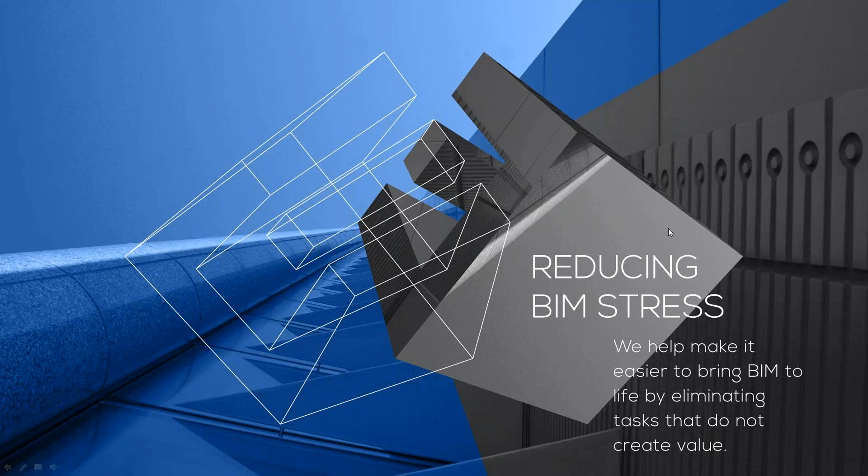A few words about our company: AGACAD is a developer, we sell our products worldwide, and we have more than 10,000 users already. We keep developing our tools, and our promise to users is to reduce stress, eliminate unnecessary tasks, and create effective ways to work with Revit.

In this presentation I will talk about precast concrete. I will talk about modeling of precast elements, how to model elements, how to insert details, how to sort elements, and how to create drawings. For this I will use different tools which are included in the Precast Concrete Suite.

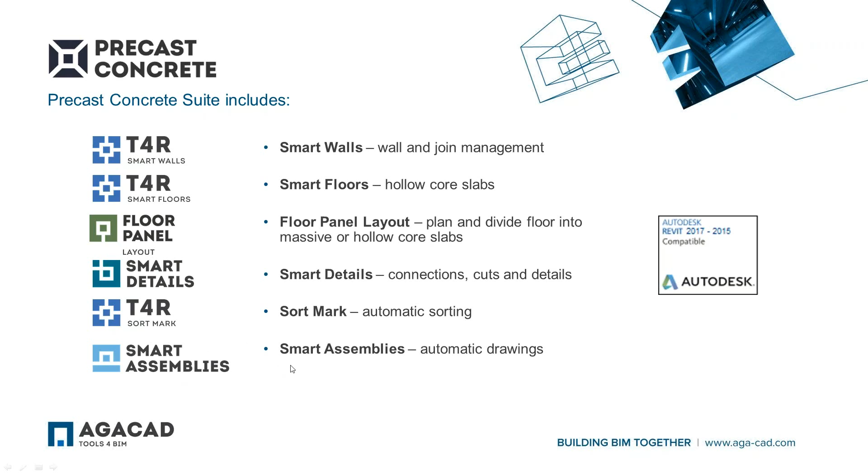We have Smart Walls to split walls, Smart Floors and Floor Panel Layout to create hollow core slabs or just massive slabs. Then Smart Details to insert connections and cuts and any kind of details. Then we sort elements automatically according to size, type, or whatever parameters we have. And then Smart Assemblies to create drawings in the end.

So again, you see here information on what you will see: how to split walls, how to create hollow core slabs, and prepare shop drawings. Anyway, we will see this in a live demo. So let's just switch to Revit.

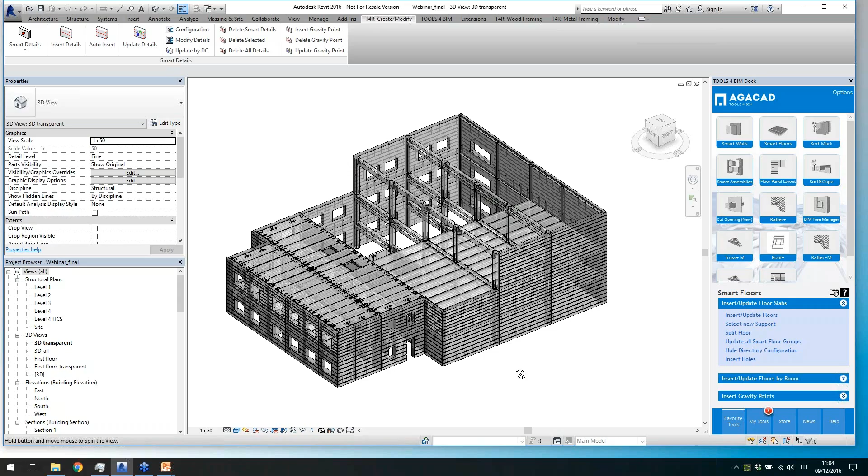I need to maximize this one. So here you see an already created project with walls divided into separate panels, then floors created, hollow core slabs created, then I have details inserted into different elements. So I have automatically distributed different kinds of details, cuts, at the ends of the slab, at the sides of the slab - just face-based details inserted in different ways.

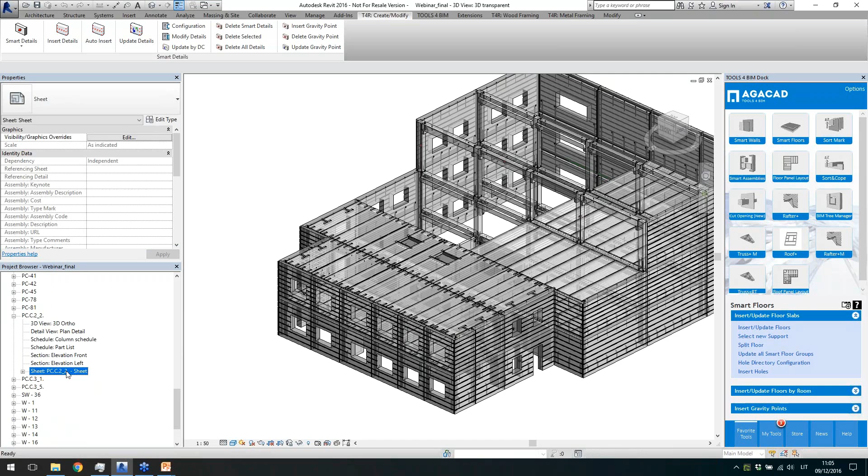And then at the bottom I have all my assemblies, and what we can create is this kind of automatic drawings - it places views on the sheet automatically and places automatic dimensions. So let's see a few other examples and we'll get to action.

Okay, I will close down this example project, and now let's see how to do that. I will use this project - it's not finally created, so let's start. First of all, I will go to level 1, and let's overview the Smart Walls solution. So Smart Walls are for splitting walls. Basically this is the main feature I want to share with you, but Smart Walls also have a few other features, like if you click on this command of Smart Walls.

Like if you will click on this command of Smart Walls.

So you can see all the walls in your project. You can group them differently according to different parameters. You can add any information here in this window, and it's easier just to control information, to change data in these columns.

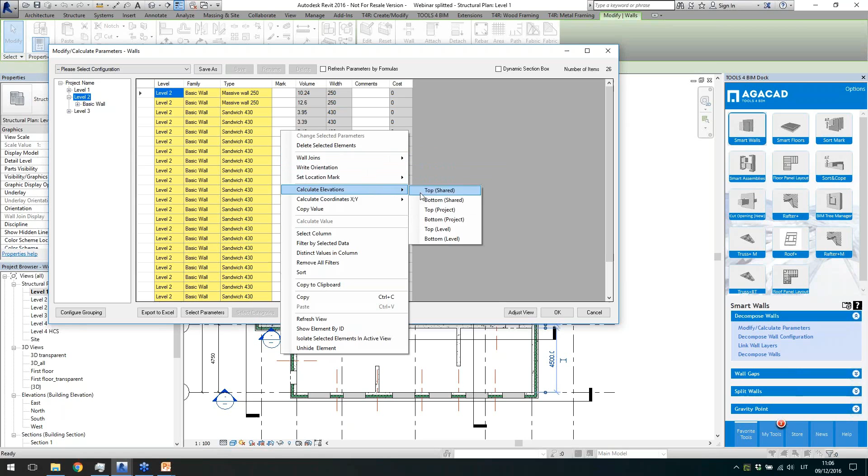You can also, let's say, disallow joins of selected walls. You can calculate elevations or write some additional information here or delete information. So in this window you can just manage the walls.

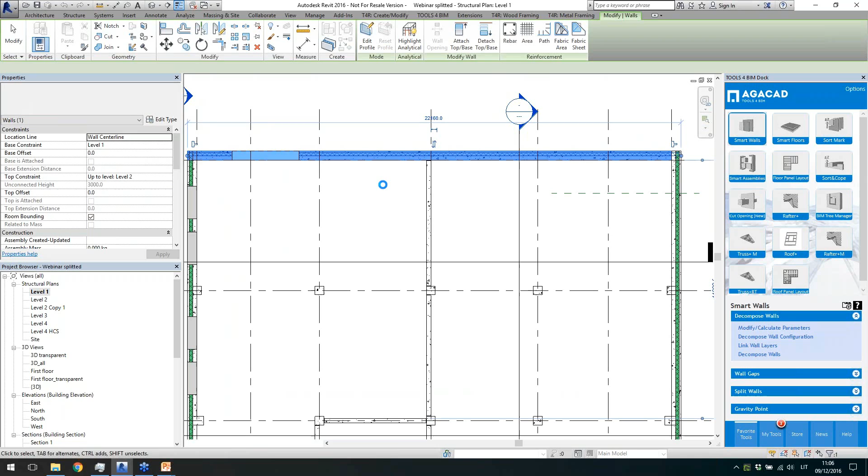And then another feature is to decompose walls. So if you have a multi-layered wall, you can just decompose it. What does this mean? It means that you can create separate walls from this one wall, so you can create 2 walls or 3 walls. In this case I have created 3 different walls, so you see now different types of walls created.

So sometimes it's good when you want to separate architectural layers from structural layers. You can use this functionality also. But today mainly I will talk about splitting of the walls.

So we have this split wall menu, different commands how to split walls, and over here we can define some gaps, gap configuration by wall type.

I will open this one just to show you that you can assign different gaps between walls. When you proceed with the splitting command, these gaps will be applied at the splitting line. So I just have different gaps for different types of wall.

So I have this wall in my project, so I will have 0 gap, and 20 millimeters gap, and so on. So I do this modification, and if I use, let's say, this command shorten picked wall end, with this command I can just separate my walls one from the other.

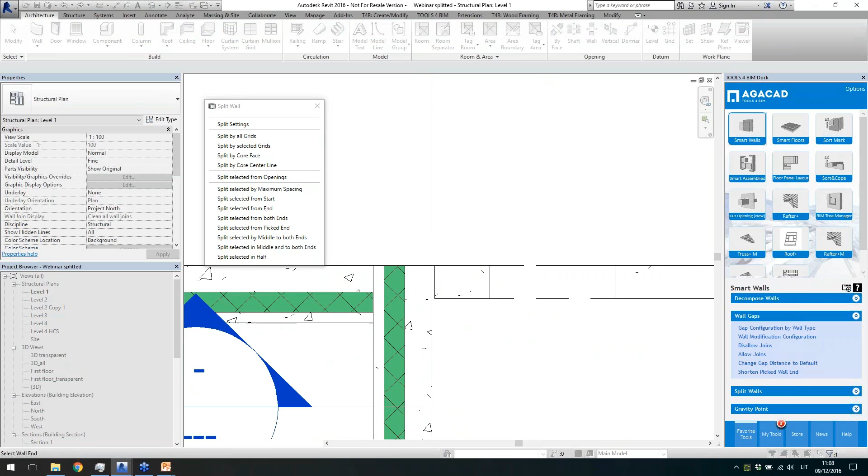Let's say I will select this end of the wall, so it was disconnected. Then I select this wall, and now you see I have 0 gap here, but I have 20 millimeters gap here because this is the setting for this type of wall. So I can do that in the desired position.

I just can separate these walls from one another. So this is like one of the ways how to change your connections of walls.

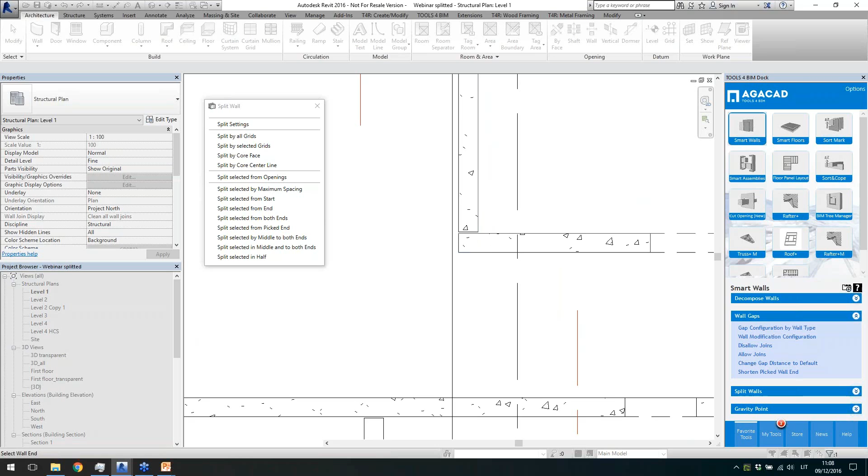Let's say I'll click maybe like this. I will change it back to that. Okay, probably I would want to do it like this. Okay, so I separated some of the walls.

Now I would like to show you splitting settings. So what can we change here? In the splitting settings, we can define what should be the distances from the openings, what should be the panel width, the maximum panel width, or the minimal panel width. According to these settings, our splitting commands will work.

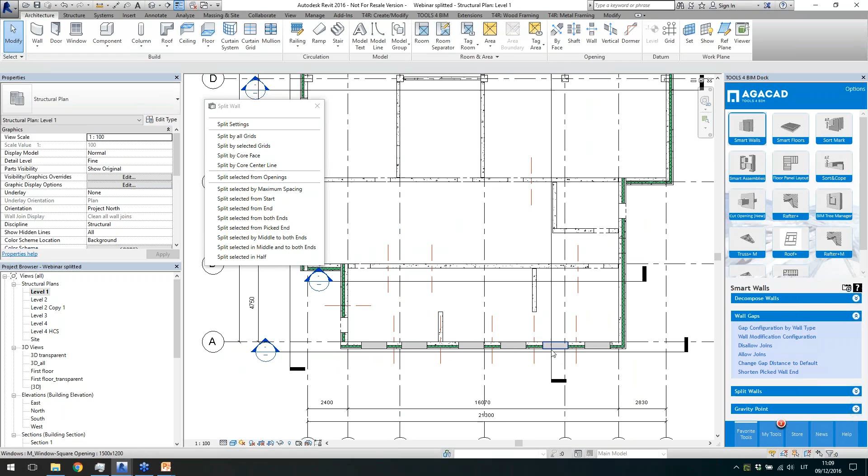So here we have splitting in particular places, a few commands to do that. Let's say I have these fake grid lines, just draw these grid lines, and I can use them to split my walls. First of all, maybe I want to just draw these splitting lines and then coordinate with, let's say, architects or other disciplines, or with a manager or whatever, the splitting location, and then I can use these grid lines to split.

Let's say I will select split by selected grid lines, and then I select these grid lines one by one. Then I hit the escape key, and I select the walls which I want to split, and then escape again. Now you see I have these walls split in the desired place. So this is one of the ways to split in an exact location.

So probably I can also do that here. I want to split it here, here, and here. And I'll click escape, select wall, and click escape again. Okay, so now I have these walls.

And let's say I don't need a special place for this area, so I can just split this one from the start, let's say with a desired step. And you see now I have this wall with defined panel width. I have the splitting, and the last one will be shorter, but that's okay. That's what I wanted to achieve.

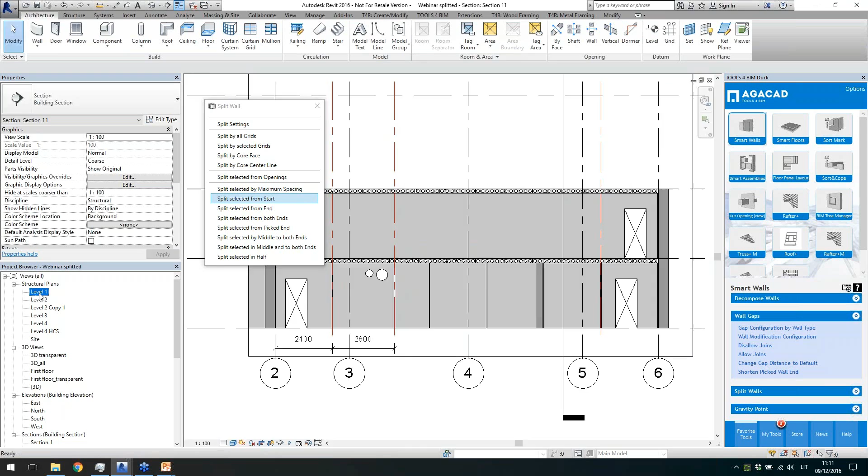So that's the way how to quickly split walls. Then also we can split by core. So I can select one wall, another wall, hit escape key, and I can split just in the middle. Let's say for this kind of connection I need the split in the middle, so actually I use just a wall to split another wall. That's another option.

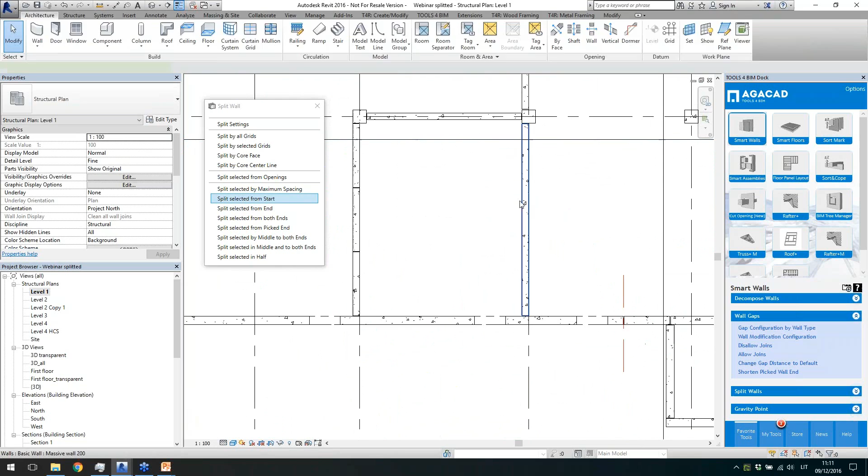Then let's say I also have a long wall, we can select, let's say, split by maximum spacing. So now my panel will be split according to that rule, and now I have limited just the desired number of panels. The split was automatically produced. So that's the way how we can split walls in different ways, just using different commands and controlling this.

So this is the smart wall solution. What can we do with it? I will switch now to smart floors. So smart floor solution is to create hollow core slabs, and for hollow core slabs we have two solutions: smart floors and floor panel layout.

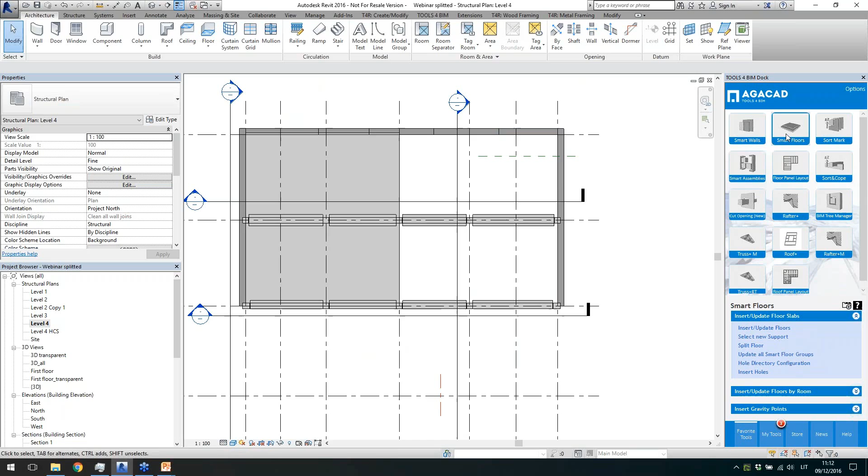So smart floors works like this. I need to define a boundary. Where do I want to place my hollow core slabs?

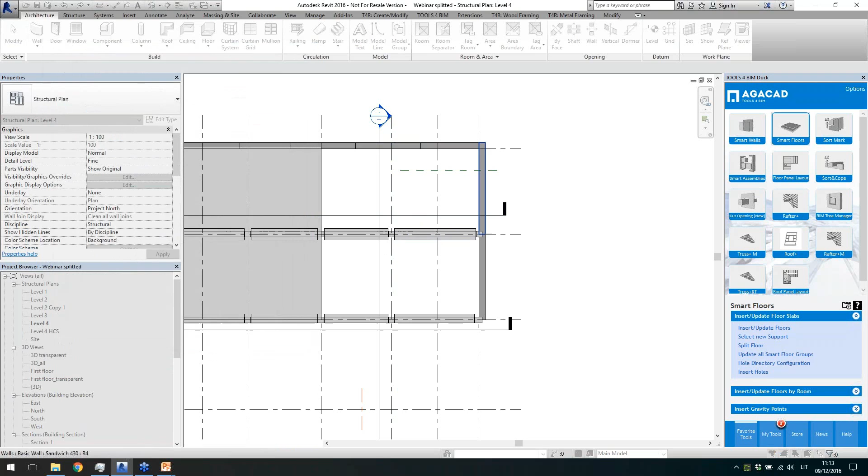And then create them. For this I will use the command Insert Update Floors. Now I will give the name of a group, and define the boundary - where do I want to create my floors. So start support, I can select wall, or I can select beam.

Or layout could be grid line or reference plane. When I do that, I just need to assign the parameter which will be used to calculate and write parameters to the floor, or I can create another shared parameter. This parameter will be used, let's say, to write the length parameter. Then I need to choose the floor type I want to use, and select the openings I want to use.

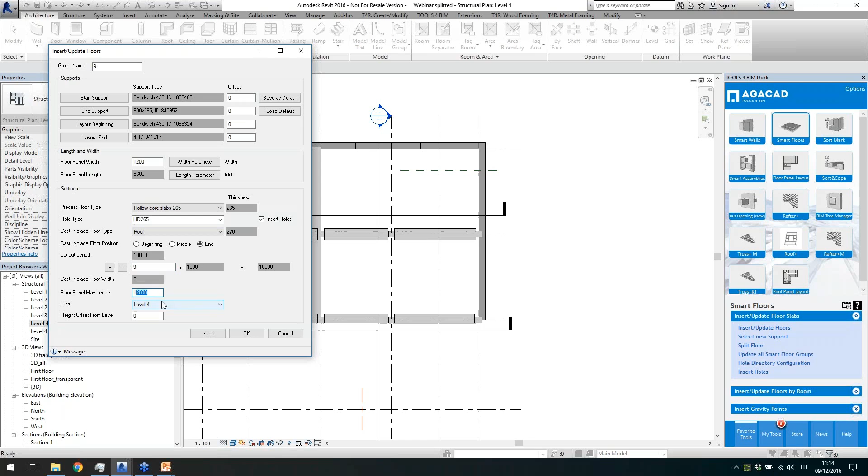These holes are installed with a solution, with the smart floors, but you can modify the shape later. Here I have information about what will be inserted, like panels with desired width, and then the level where it will be inserted. I will do this now - I will just insert these.

So I will close down this window, and now I have this floor, and additionally I have a generic model family of the holes inserted. If I take a look at the 3D view, you see now I have holes, and I have the floor panel, the selected type of floor panels.

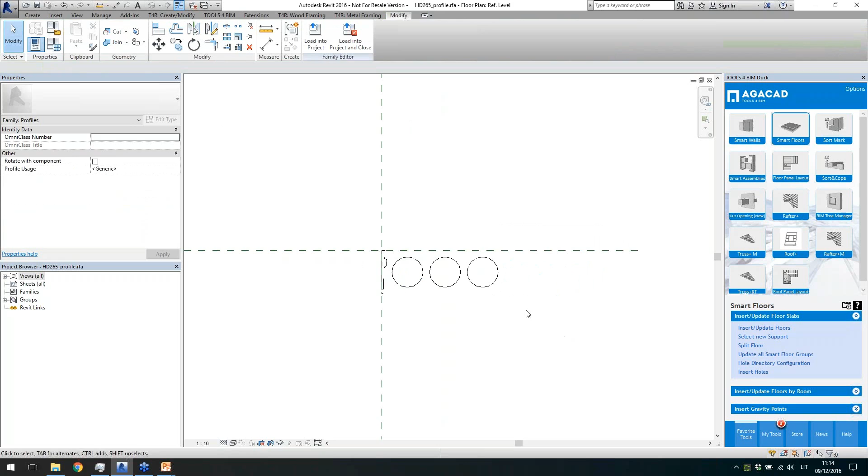How these holes could be modified anytime - I can just select them, edit family, and save it under a different name, and edit the profile, and draw this profile with desired lines. So it could be, I don't know, the holes could be shorter, just to define narrow slabs or whatever. Just prepare them according to your local manufacturer and use it to create hollow core slabs.

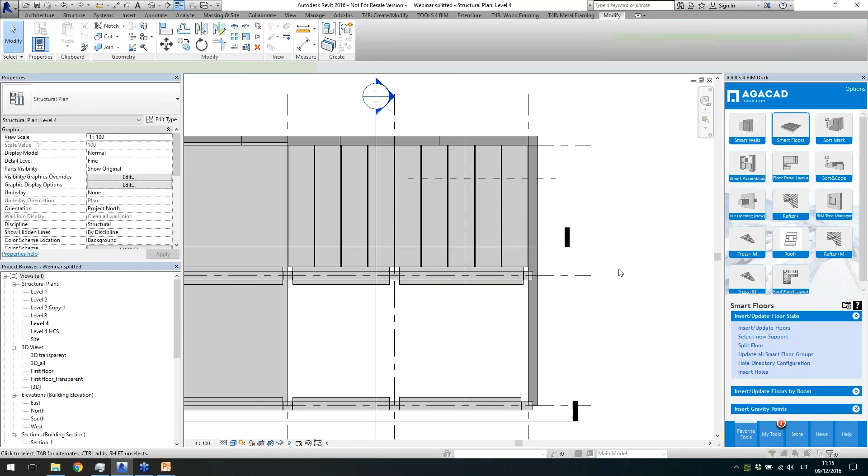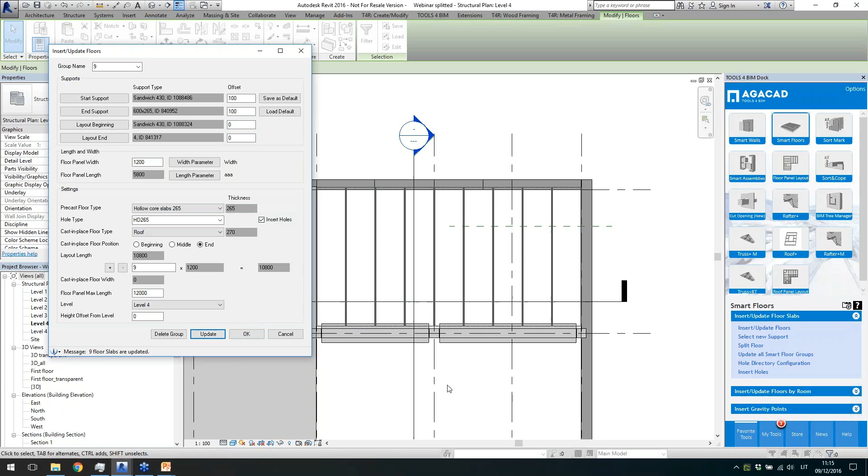Now what's important in this tool is that we can modify these groups. We can, let's say, extend these floors - because now I need to support them on the beam, so I will extend them. Update. So you see now it was extended.

Maybe one more thing I want to show you - you can also change the position, you can change the layout boundary objects. Let's say I will select this one, and I will click on update. So now I have two slabs of this width, and then I have a cast-in-place element because it cannot be created with a 1.2 meter slab.

And all of my slabs have these parameters, as I showed you, like the width parameter of 1.2 meter and this newly created parameter to define the length. So this is the way you can work with these floors.

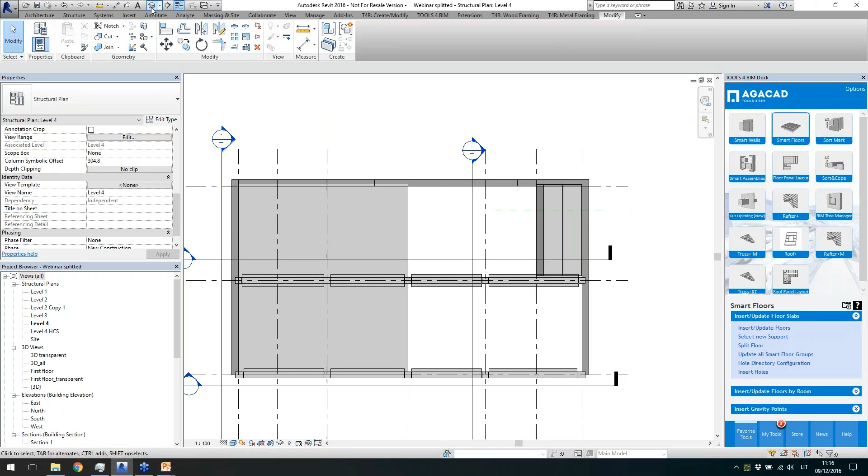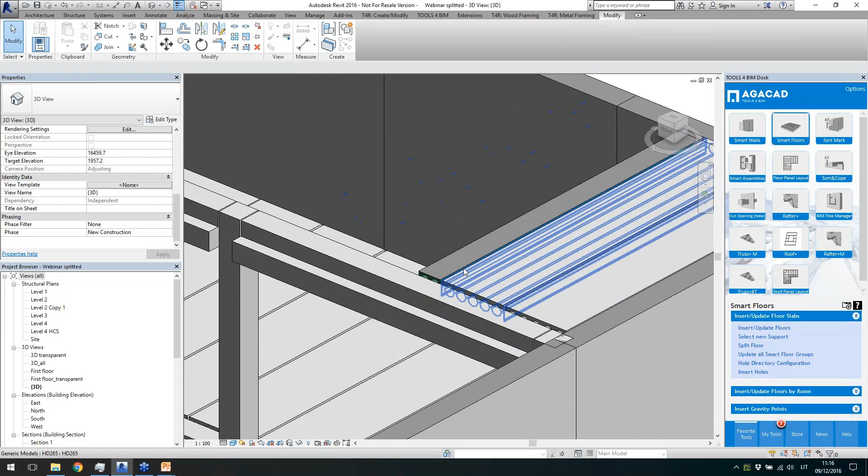And then you have additional options like select new support, so it will be updated, the floors will be updated when you can insert additional floors. Let's say you can select just the floor and insert these holes additionally to the other elements. Then, yeah, different ways how to just update these floors.

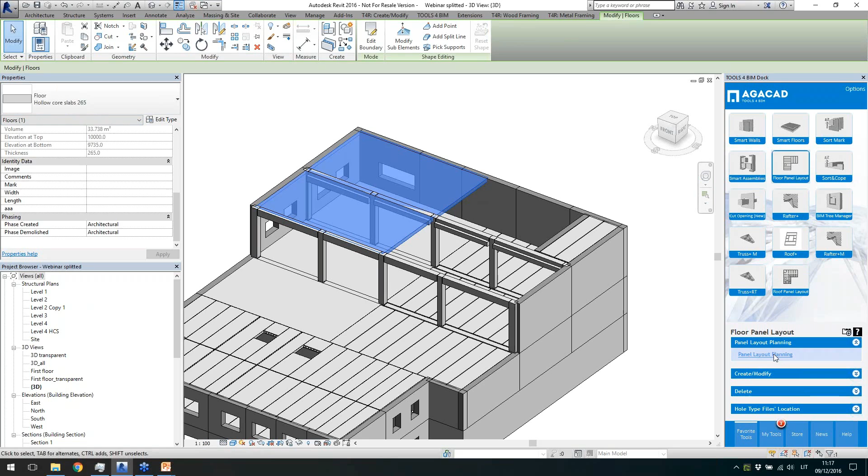Then we have floor panel layout, and we have already created the floor. So the floor panel layout, we can actually just split the existing floor, not create floors like with the smart floors, but just work with this one, with the existing floor.

So what I want to do here, I want to insert floors here and floors here. For this, I need two regions, so I will add a split line, and I will add the split line here. Okay, so now we see I have one region over here and one over here.

And panel layout settings - in this floor panel layout, I can also select similar settings to the smart walls about splitting the width of the panels and the direction where I want to split them. And then I have these commands to create panel layout for the floor face.

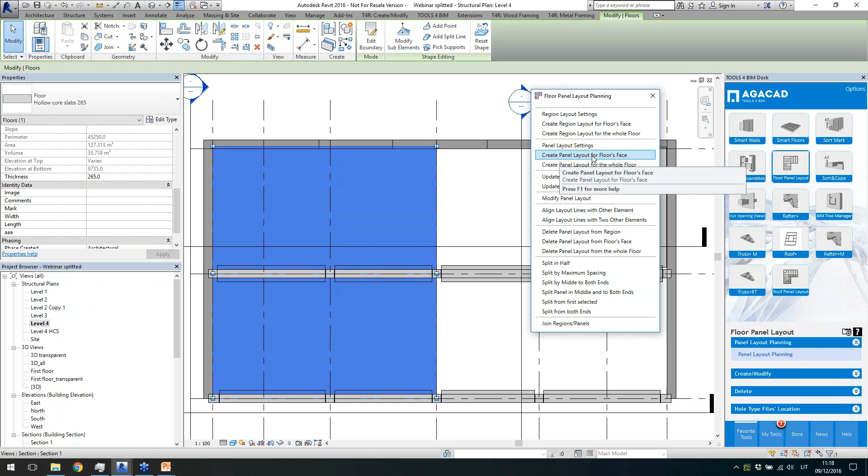I will select this one, and now I can select the side of the area. You see this blue area defines where my floors will be created. So I will click on this area. Okay, so now I have splitting lines, not panels yet, but the lines for my floors. I will do that again, and click on this area. So now it's going to the different direction, but yeah, probably I will just undo that.

I will go over the right direction. So when I hit on this side, I just have different layout direction. Then, okay, if I want to, I can modify these lines.

Now, let's say I will join some regions. I will do this a couple of times. And let's say, what can I do? I can use different commands. I can split it into half, split according to the rules, split by middle to both ends, or whatever.

Okay, so let's say I select this, I will select two of the lines. And now you will see I have 1.2 meter panels in the middle, and leftovers are on the side. So it depends how do you want to do that.

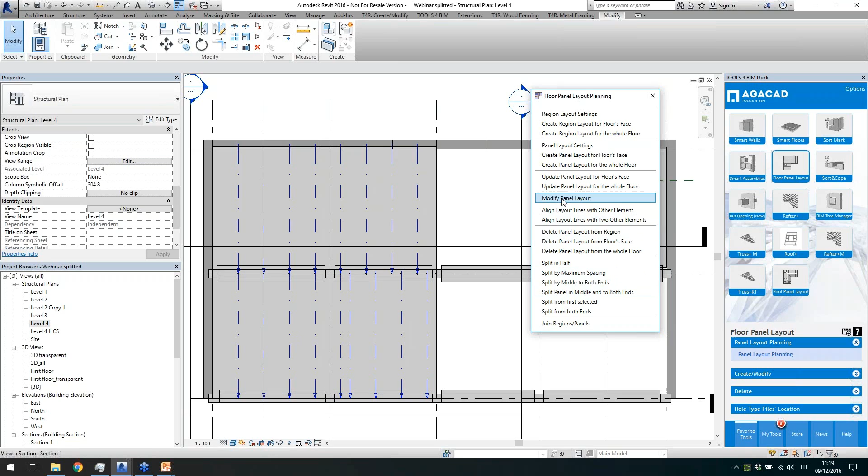You do the planning, use these commands to update, modify, plan, and so on. Delete the regions if you need to. Or there are other commands for how to control this.

And after that, you can go to this create modify panel settings. Also overview what do you want to create, just end and start, offset values, parameters for the width and length, and what can you - if you will insert, what kind of slab do you want to insert, if you want to insert holes, or what should be the cast in place, let's say panel, save these configurations, and create panels, let's say for whole.

Floor. So I will select this floor. And now you will see that I have these panels. Now in this area I have only,

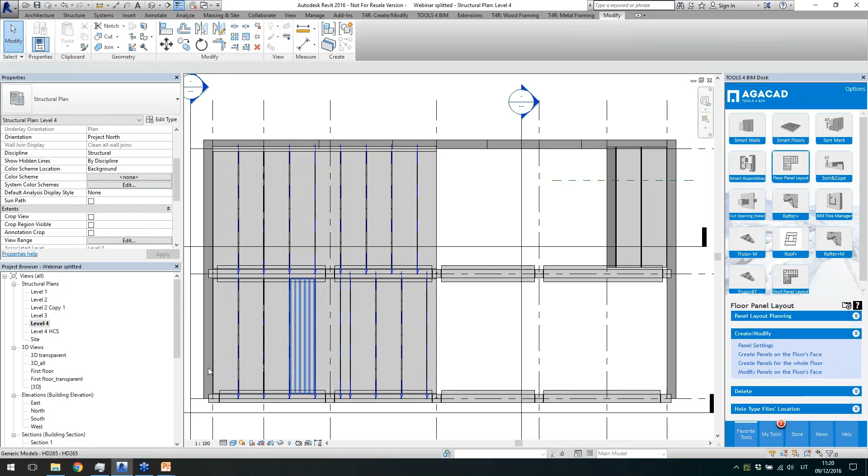let me switch to this one maybe, view. So here I have just a floor without holes, because this is like cast in place floor, and I selected this kind of floor to use in this area. And for this one I selected to use this system floor family, and that's just how I create these floors on top of existing floor.

So that's another way how to create slabs with holes or without holes. So it depends what do you want to create.

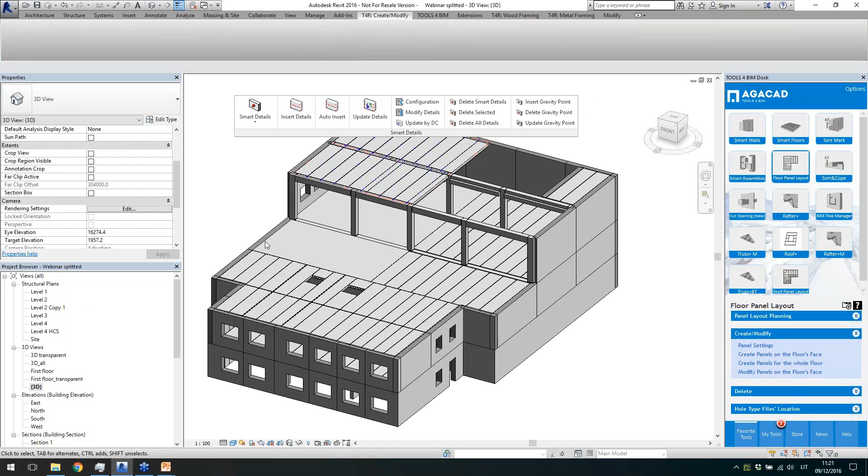Okay, and another solution I have is smart details. So when I have created my elements, now I want to insert some details, connect elements and so on. So let's say, what will I do now? Let's see how it works.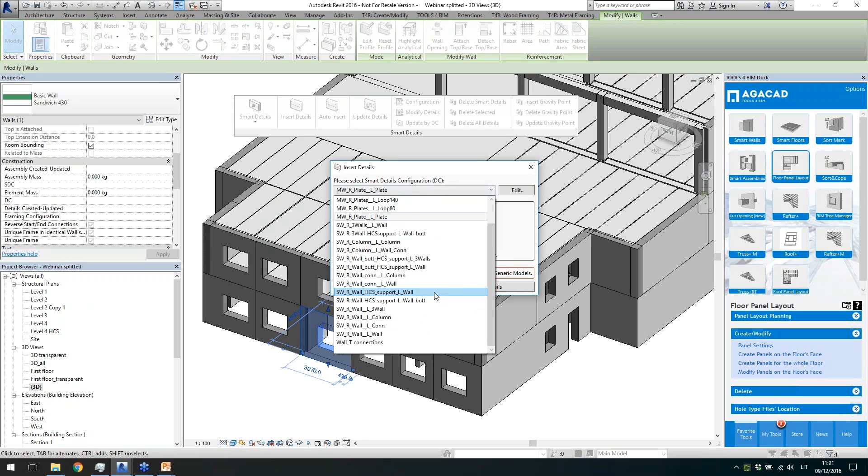I select the element and I click on Insert Details. And then I need to pick the configuration which I want to use here. So I will use this configuration, and I will click on Insert. And I will just go back to configurations later, but let's just see the result.

Maybe I will switch to the transparent view so we can overview what was done with my command. So I have some line-based cuts on the side face of the wall. Then I have some connection details on top, just with defined rules.

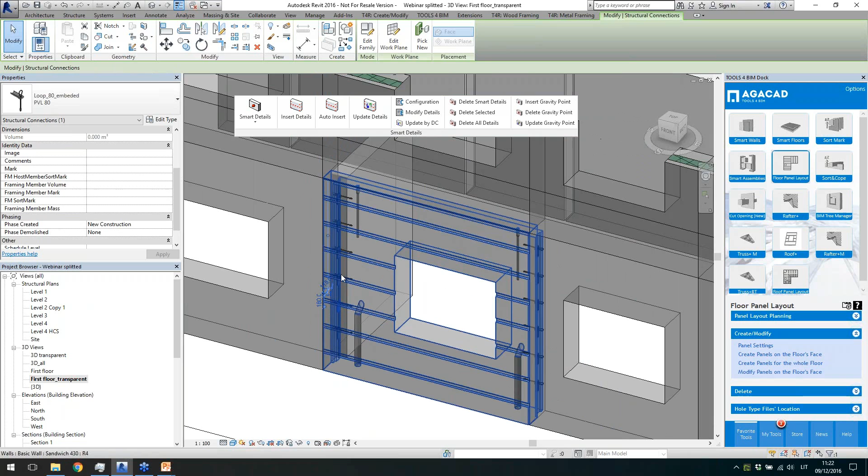Then I have also side cuts, like form of this kind of form at the sides, and then I have distributed some connection details also on the side. And then also I have a cut to support my hollow core slabs here.

So with one command, with one configuration, I just inserted a lot of these details, and I can actually do the same for other elements. I can just select as many as I want of the elements if I think that the same configuration could be applied to them. So I can do that, and let's say the result will look like this.

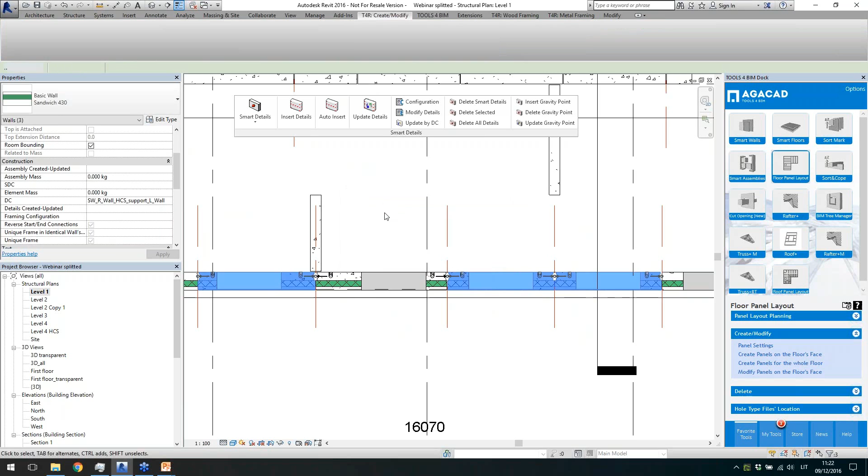So I have these cuts, I have these details, I have some details at the bottom of my walls and so on. So let's see other examples. How can we use smart details?

But yeah, before that I will just go to configurations. Okay, I will select the detail and I will modify this detail, and we can see this configuration which I used. It has such a setup.

On the left side in this configuration window you can see line-based details which can be inserted on different faces, and point-based details which can be inserted on different faces of selected element. And this could be walls, beams, columns, and other elements where you can insert the details.

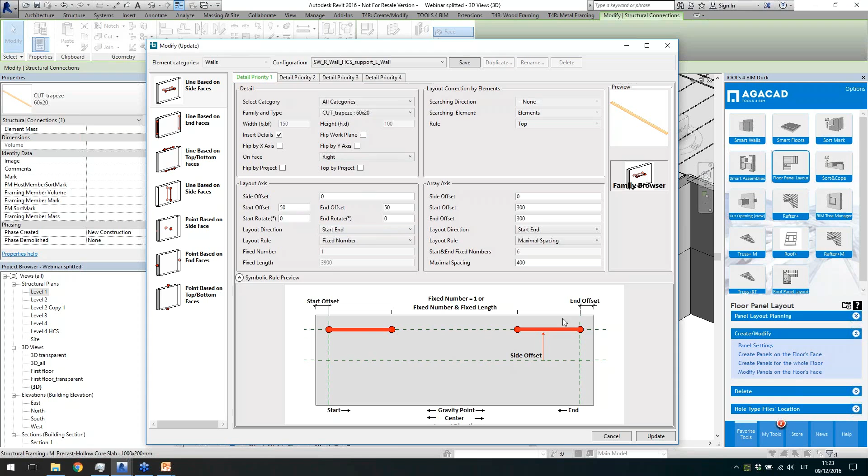So let's say this detail cut was inserted on the right face, and it starts with offset from the ends, and it goes just from the beginning to the end. And in other direction, it has possibility to just distribute them according to a maximum spacing with defined distance. So you have all these possibility to define how to insert detail.

Then on the side faces, I have one detail on one side. Then I have another detail inserted on the opposite side. I have some flipping options for the details.

So there are different ways how to insert these details. Let's say I have point-based details distributed on both faces of my wall with defined distances and maximum spacing. On top I have this detail, at the bottom this detail. So there are really different ways how to do that.

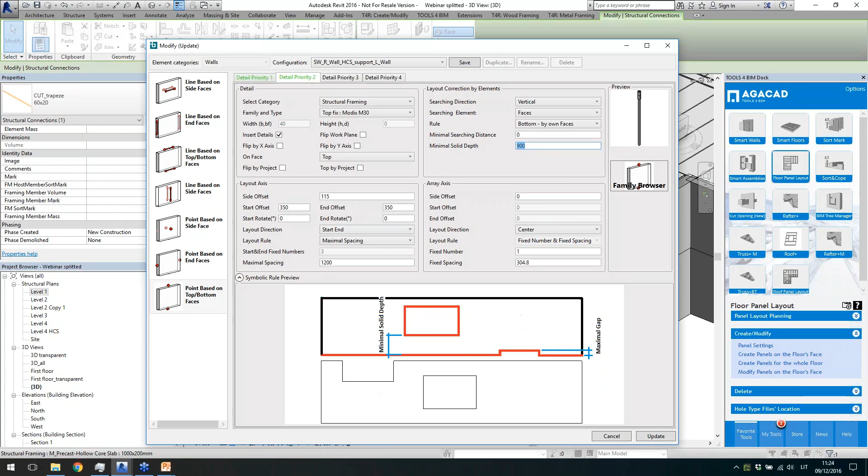I also check if there is enough space to insert this detail. I have a maximum space of 1.2 meters, but if there is not enough, if minimal solid depth is not enough, my detail is not inserted. That's why I don't have it in this place in the middle, because I have a window here.

Okay, so when we've overviewed the configurations, let's see a bit more about smart details. I will select all of these. These are structural framing families, and I will auto-insert details, because auto-insert will just read the smart detail configuration parameter in the element.

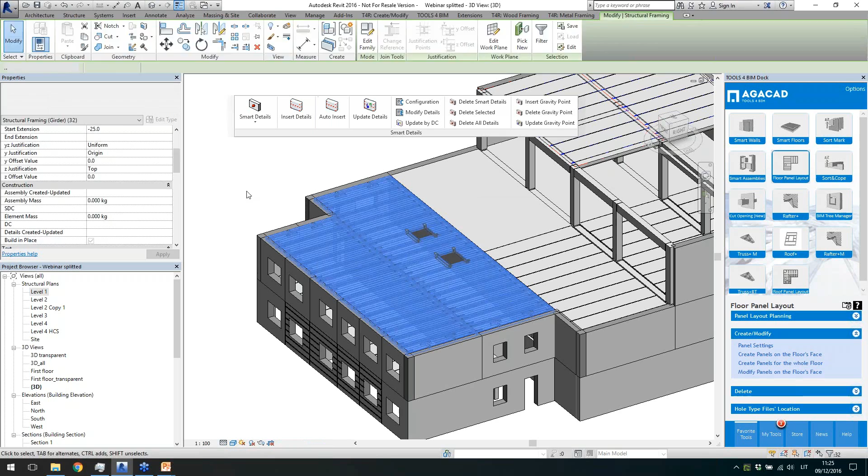So let's say in this element I have the smart detail configuration parameter with this name of configuration. Details were inserted according to that configuration, and this framing element has this configuration, so I have only cuts at the ends. Now you see I have different elements inserted on all of these floors.

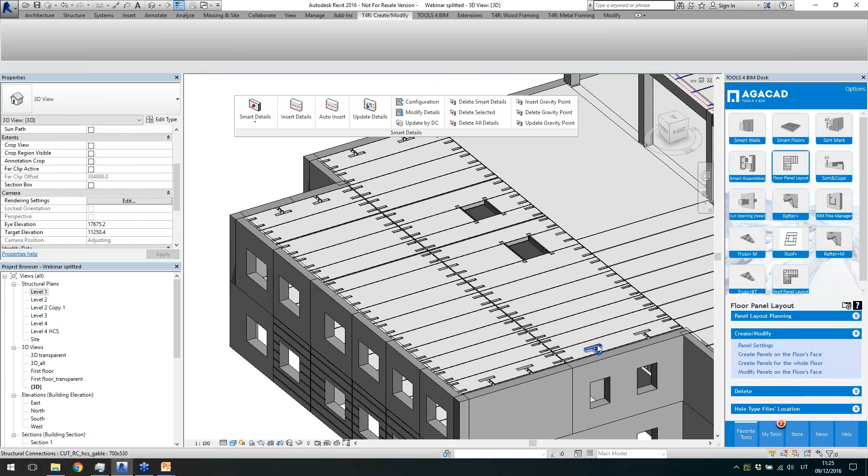Okay, these are structural framing elements in this situation, but it depends on your settings. And what can we do now?

Let's say I can select any of these details, select modify details, and just make changes to the individual element. Let's say I will just change the length of my cut. So I can do the update of this, and one element could be changed.

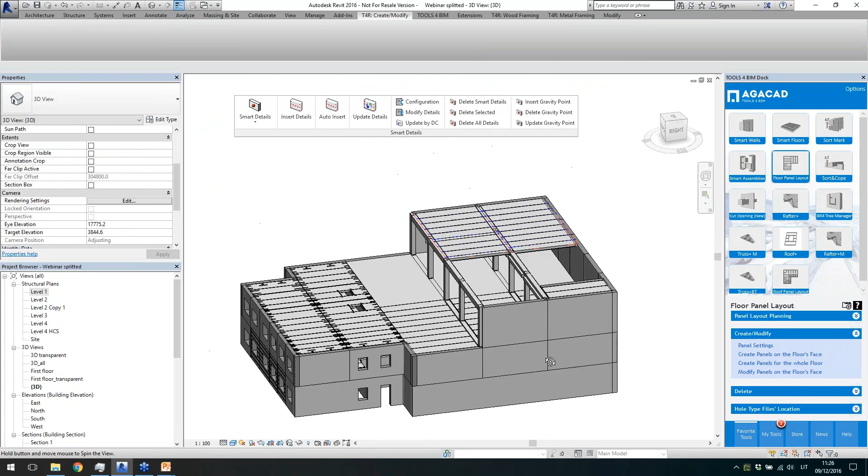I can, of course, insert elements and just move details, add manual details, and work in many different ways, but it at least makes it really quick to insert elements on different faces in the positions we need. We can adjust them later, but it will be much easier than doing it just in plain Revit.

Okay, another example, let's say I will select columns and framing elements, and I will do the same. I will auto insert elements, and we will take a look at what result we can expect here.

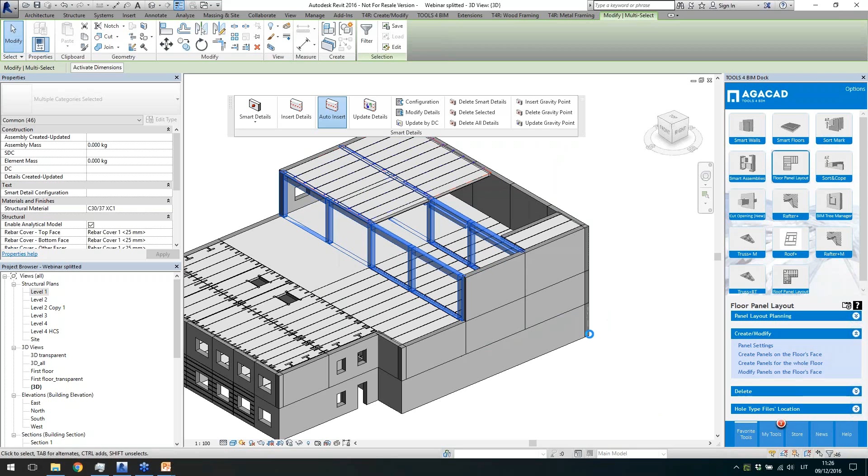So I have like 46 elements here, and I insert different kinds of connections. Maybe I'll switch to a 3D transparent view, and now you will see I have connection details in the beam. I have lifting elements inserted according to the gravity point.

Let's see if I will modify this. We can also insert elements according to the gravity point. This detail is inserted at the end of the beam. Then I have details in the columns which are inserted at the intersection point with the beams. I have bolts at the top of a column and so on.

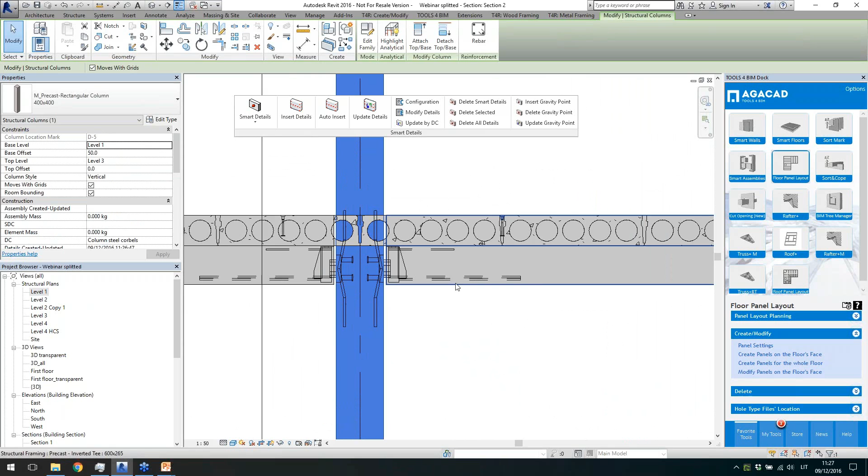So let's take a look at this detail a bit more and other features we will see. Let's say I have a column and a beam going, like some kind of T connection, so it comes into the middle of the column. And in this situation, I have an L connection.

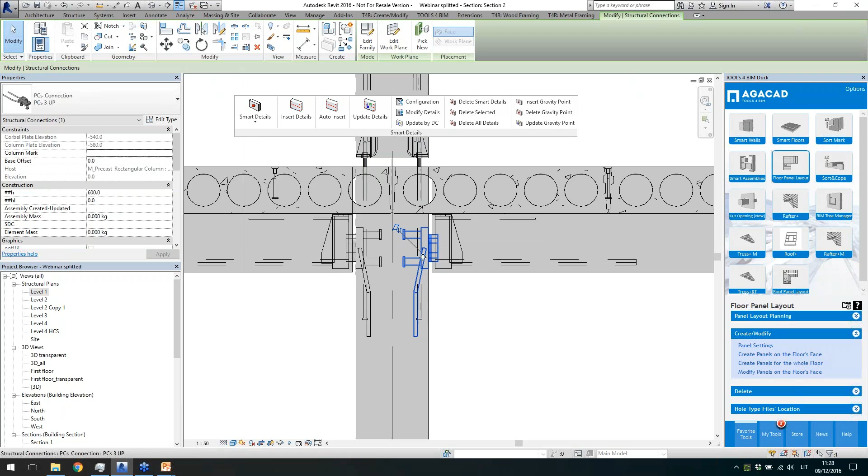So we can also find this kind of connections, the difference between elements and connections. In the L-type connection, I have this detail with only one anchoring rebar. And in the T connection, I have this kind of detail. So in the setup of configuration, I'm looking for the T connection, then I find the T connection and insert this detail.

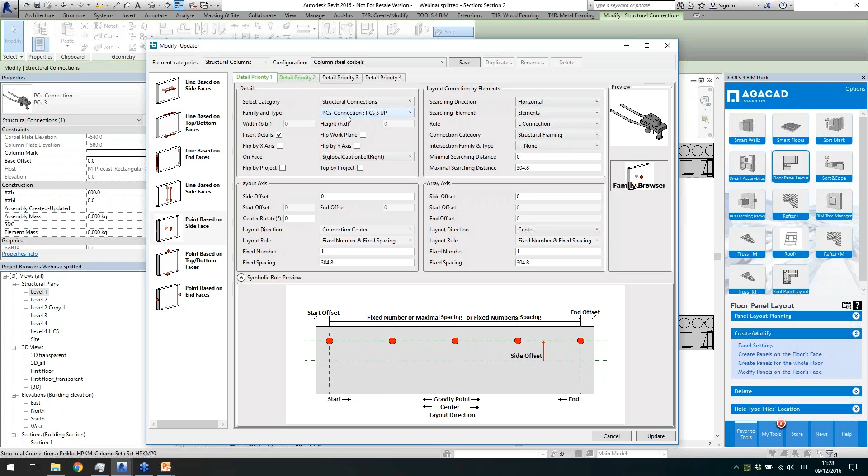So this configuration name doesn't matter, what matters is the settings here. And for the L connection, I have just a different family. So again, I can use this to find different connections between elements and define different details to insert. This could be very useful.

And the last feature of Smart Details, which I like very much, is that I can insert details and read values from the host element. You see I have column shoes inserted at the bottom of the column, and the column sizes are different. So what I did is, if we'll take a look at the column, it has parameters B and H, the column, so it's a host element.

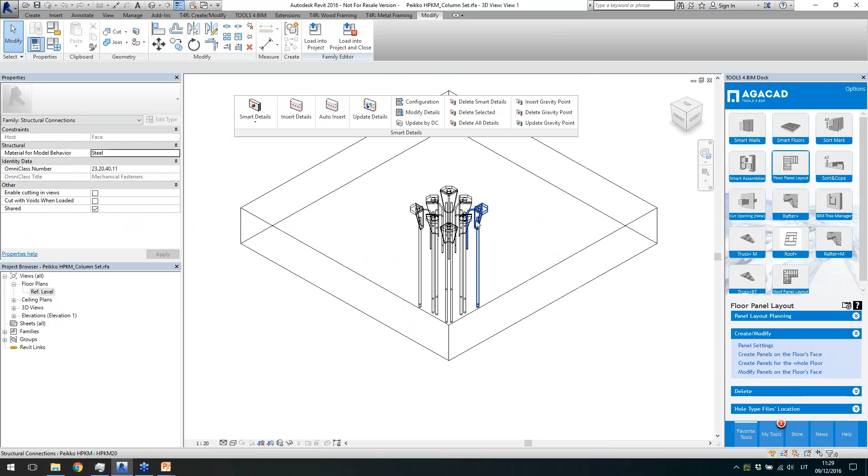And now when I created this family, if we'll take a look at this family, when I created it, I used a parameter with a hash, H. So if we'll take a look, I created this parameter in the model properties and gave it the same name as the column parameter, but added a hash at the beginning. Then during the insert of details, this family of column shoes was adjusted according to the host values.

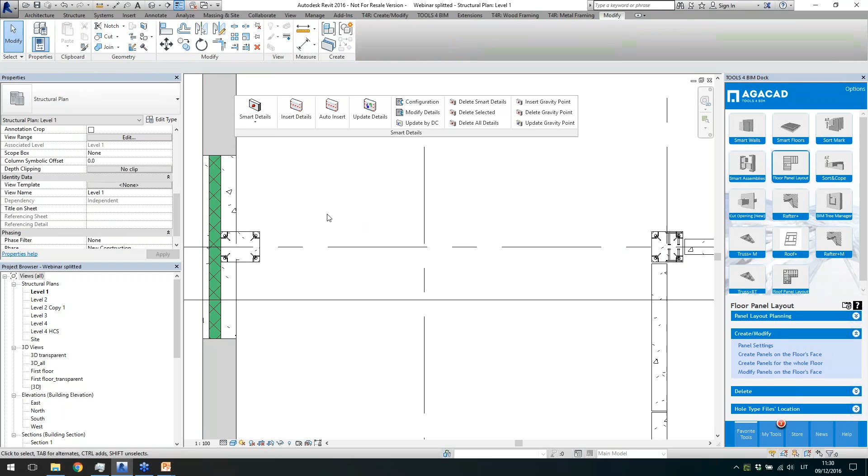So that's why it adapts to the size of the element, right? It has 400 and 500 for this column, and 400 by 400 for this column. So I don't need to manually adjust this, and I can use this in different situations.

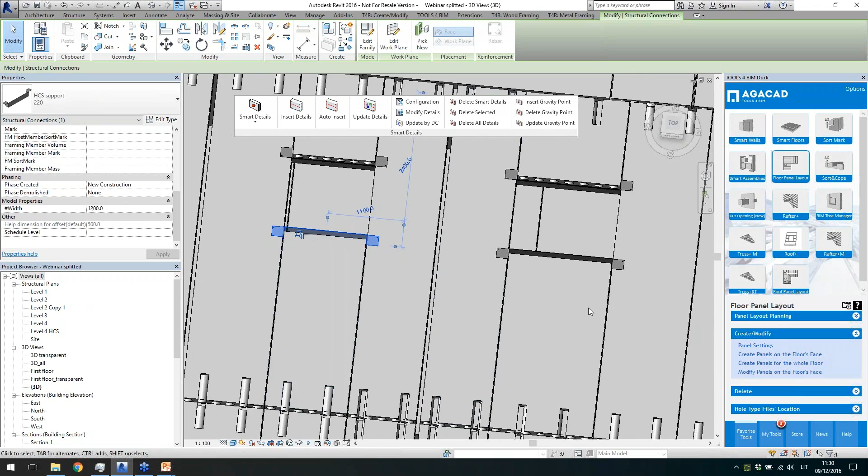Let's say I have different width parameters for these framing elements. This one has a width of 1.5 meters, and this one is 1.2 meters, and the detail just changed its size according to the host element.

Then another example might be, let's say I can also read values. Sorry, the location of the section is not in the right place. So let's say I can also insert this kind of detail, right? But if the size of my beam is different, you see that the distance—I modified the distance of insertion according to the size of the beam.

So I can also read values from the connecting elements and adjust the distance from the top of a column to the bottom of the beam. This was done automatically, so that's another way to automate the process to insert and create details. I think that's pretty cool.

And then we have different commands to update, modify, and delete these details if you need to. But basically, that's what smart details are and how they can help you work in Revit in an efficient way.

The last one, maybe I'll show you, is the sort mark solution. This allows you to do element numbering. If I click on element numbering, I can also renumber grids or rooms and spaces, but I'll choose element numbering, and I can choose from existing categories in the project.

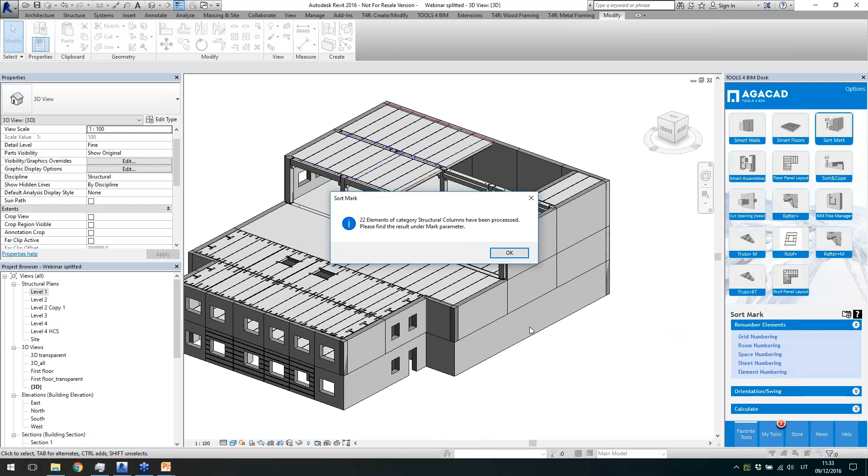So let me just select this configuration, right? 22 elements were renumbered. I'll have some duplicate mark values because the type of elements is the same and the model behavior is the same. So now I have the mark values created and written to these elements.

Let's choose another option. Let's say I'll select walls, mark, okay, and what do I want to do? I don't want to group the walls in any way, but I want to number all of my walls with unique values, right?

So I'll choose the parameter instance ID, which means that all the instance IDs in the project have a unique value. So it will create a different mark value for each of the walls. I'll add a suffix here for the sort mark, and click on OK.

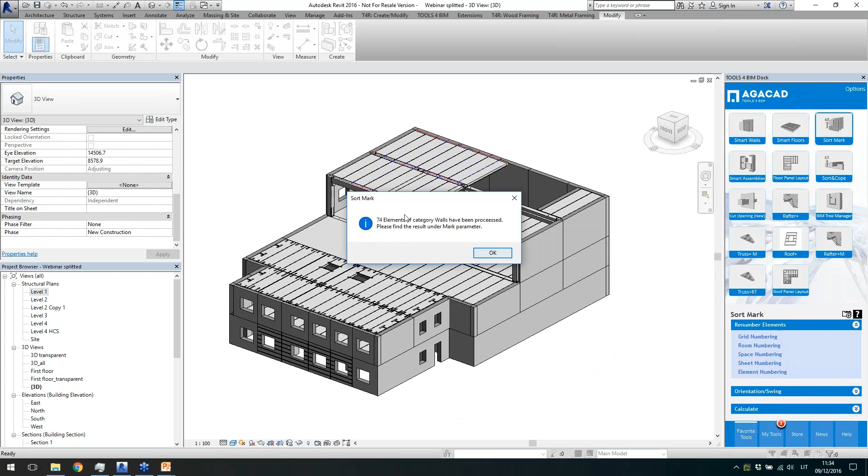So now 74 elements were renumbered automatically, and now all of my walls have a unique value for the mark. So you see, each has a different value. Okay, so this is the quick renumbering method.

The last solution is smart assemblies. If I switch to smart assemblies, let's try to create one of them. I'll select a column and just create an assembly from it.

So what I need to do is select a configuration again, which defines what should be created. I'll open this one, and for column formwork, I'll choose the configuration and click on create.

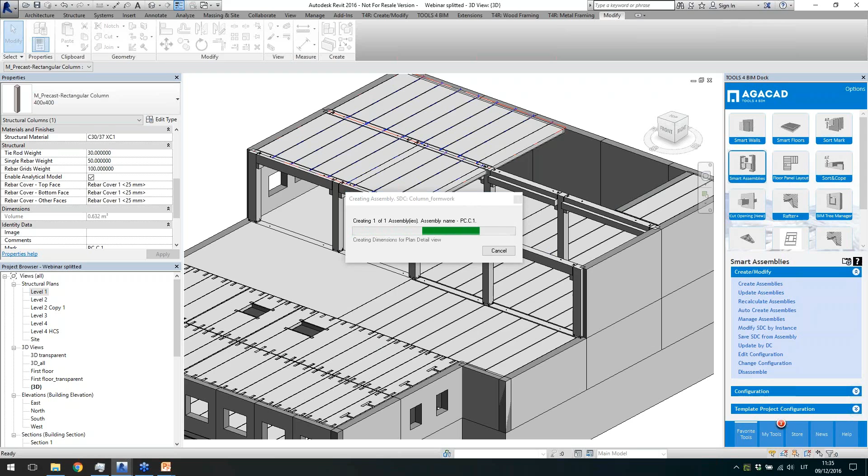So we will see what will be created. Smart Assemblies will take the host element and automatically pull in all the details into the assembly, so you don't need to select details separately. You just select the main element and create assembly for it.

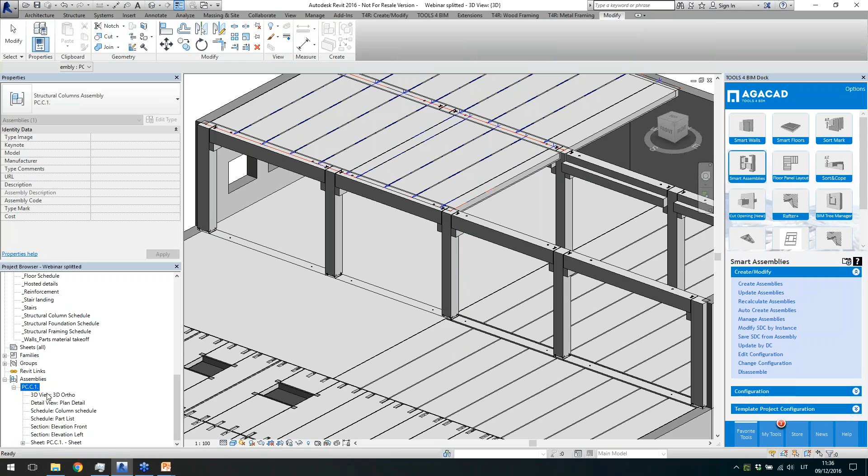So now I have assembly created with all the details. Then I have views created and views are placed on the sheet. How are they placed on the sheet? It depends on the sheet template. I will get back to this now and let's see how we can achieve this.

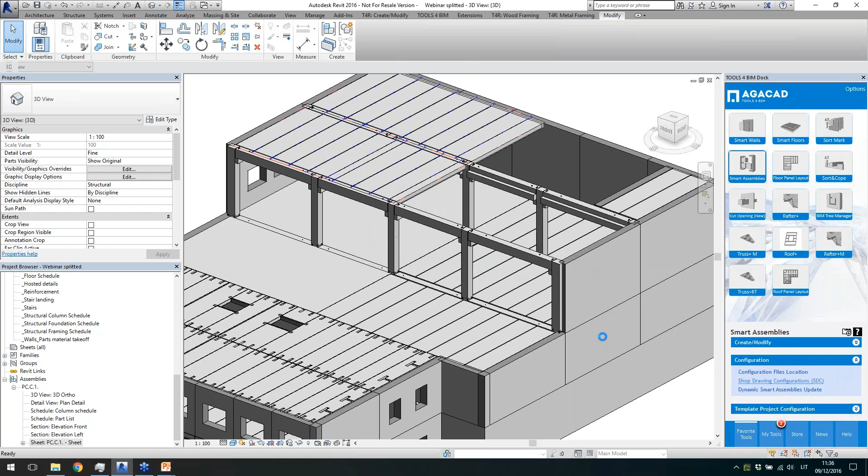For this I will just go to the configurations, shop drawing configurations, and let's see what kind of configurations we can create. In this window I can create as many views as I want for the assembly, so I will just add view. I can select the type of view, so standard Revit assembly views, and also some flipped versions of the views.

This could be like the view looking to the opposite side automatically, so we can just select one of them, right? And then you can select the view type. You can select the view template which we want to apply to the view.

Dimension rules, also you can create them, and dimension rules are described here. These rules describe how the main element should be dimensioned, how holes should be dimensioned in the main elements, and how hosted metal details should be dimensioned.

So they can be dimensioned, let's say, at every point of a solid. It could be dimensioned to only total dimensions, or it could be dimensioned just to the model lines. So you can have model lines inside of a family, and it will snap only to this model line. You see this complex shape of the detail, but the dimension line just goes to one point, because inside of this family I have a model line.

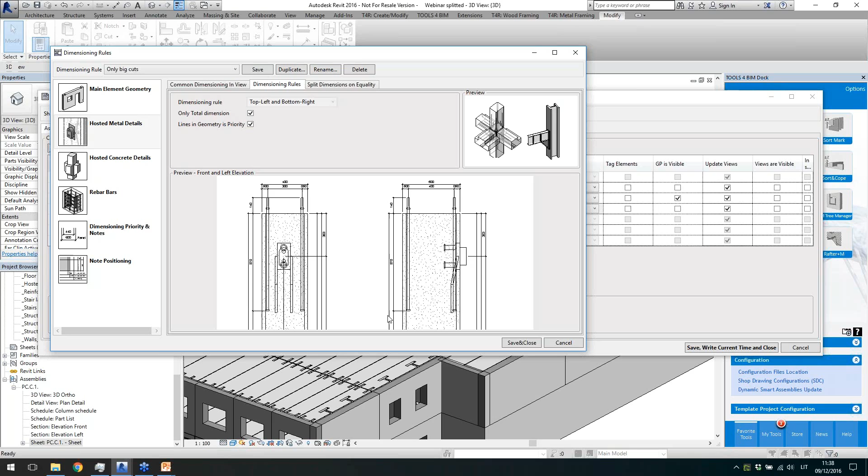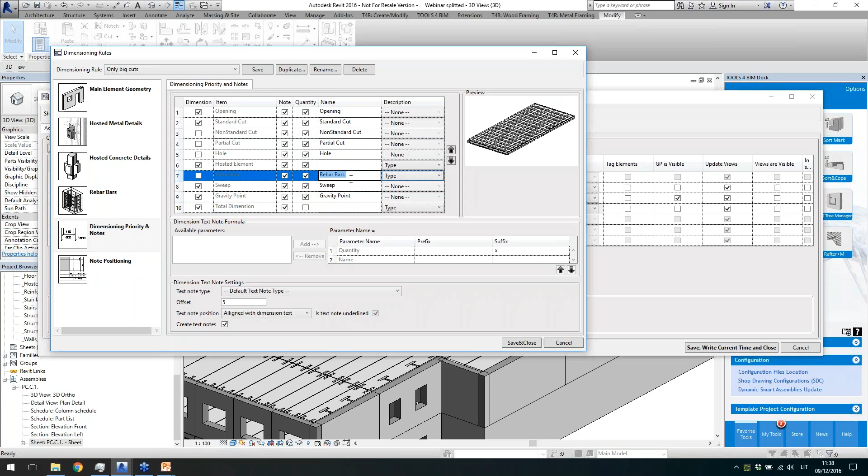Then we have dimension rules for the hosted concrete details, dimension rules for the different rebars, and then a dimension rule for the notes. So you can select if you want to dimension, or maybe you don't want to dimension holes. You can change the names of notes which will be displayed, then parameters which will be displayed, and then define where you want to see these, about just the details, the holes, or dimensions of the main element.

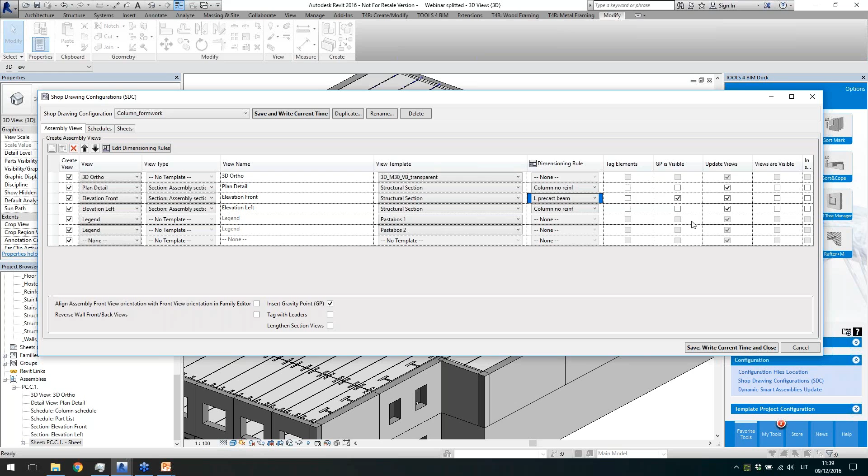After you click create, these dimension rules can be applied differently for different views. Then there are some options to insert a gravity point, as you can see in my element, and some options to reverse wall from front and back views, which is important when you work with walls.

Then you can go to schedules. You can again create any number of schedules and apply schedule templates. Actually these are real schedules which I already used in this project, so this is not view templates, but schedule templates. These schedules could be used as a template for newly created templates. Then you can count according to instance or type of assembly, and at the end you can select the sheet template which you want to use to create the next elements in your project.

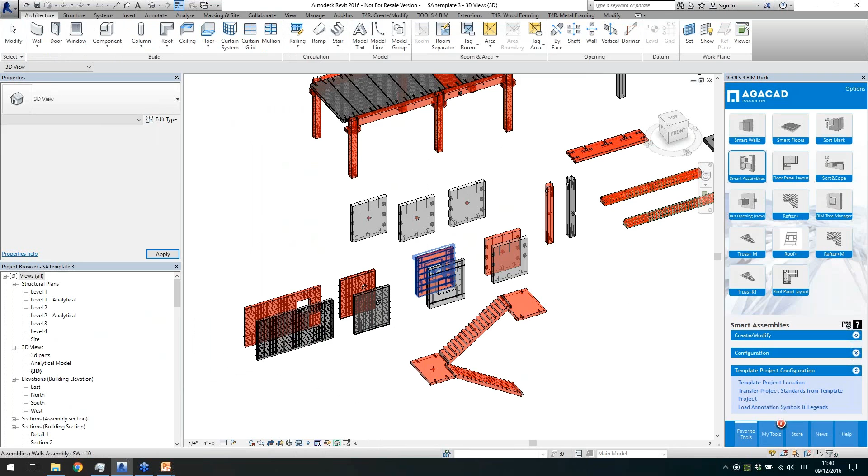So how will the views be placed on the sheet? You can place your views on the sheet, and this sheet could be used as a sheet template. But why did I get views automatically placed on the sheet? Because Smart Assemblies has this possibility to have a template project. What does that mean? It means you can actually have a template project, like this one.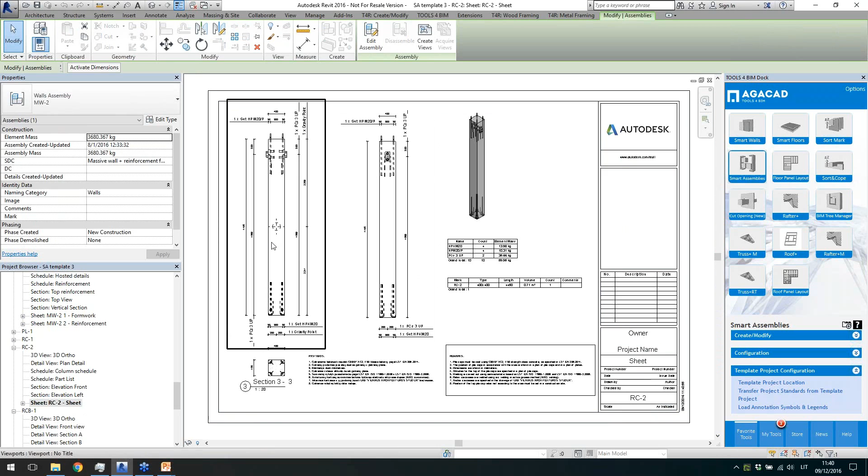I have a template project where I have created different assemblies, and I have placed all the views on the sheet. In that case I used a configuration like in this project, and I used this sheet as a template. That's why in that project I got these views automatically placed on the sheet, because it's a very similar size of element. So I can use the same configuration as in the template project and just place these views on the sheet.

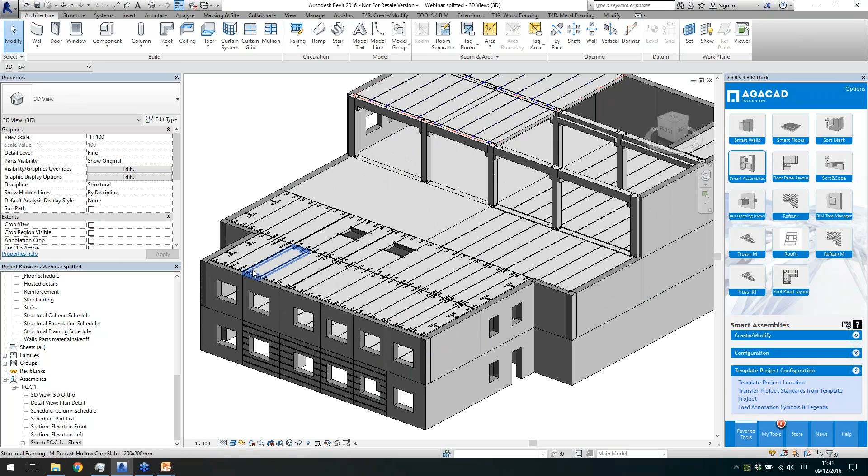So we can do that for different elements, right? Let's select one of the elements. I need also a mark value for the elements - I didn't remember to set this automatically, so I will just give any mark value, because the mark value in Smart Assembly is used as a type name for the created assembly.

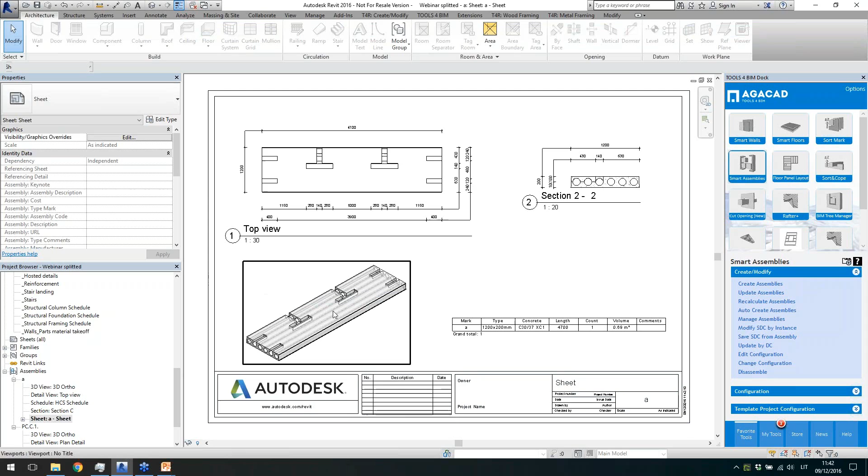So I can just select this assembly, select the configuration which I want to use, and click on create. Smart Assembly works with different categories of elements like generic line-based elements, framing elements, columns, and so on. Let's see the result - again views are placed on the sheet, just like in my template project. Let me switch back to the template project again.

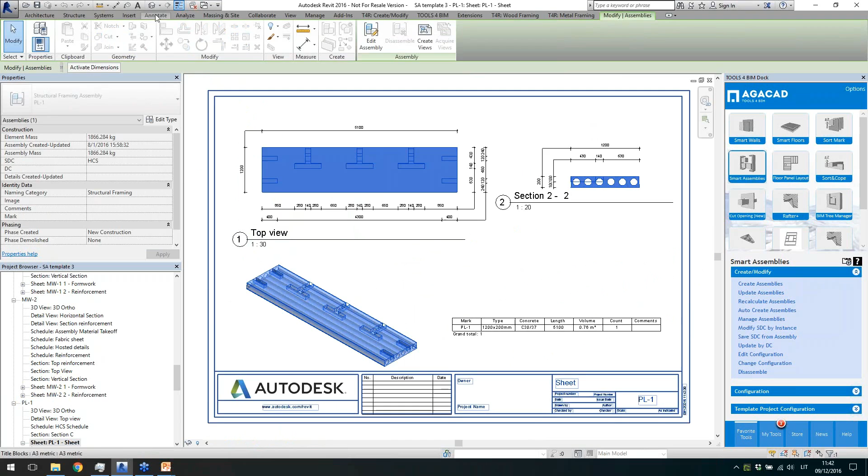So this is something we can achieve, this kind of drawing. We have dimensions for the details, for the cuts and schedules, and we can use this as a template. Also stairs, the stair landing, this kind of dimension.

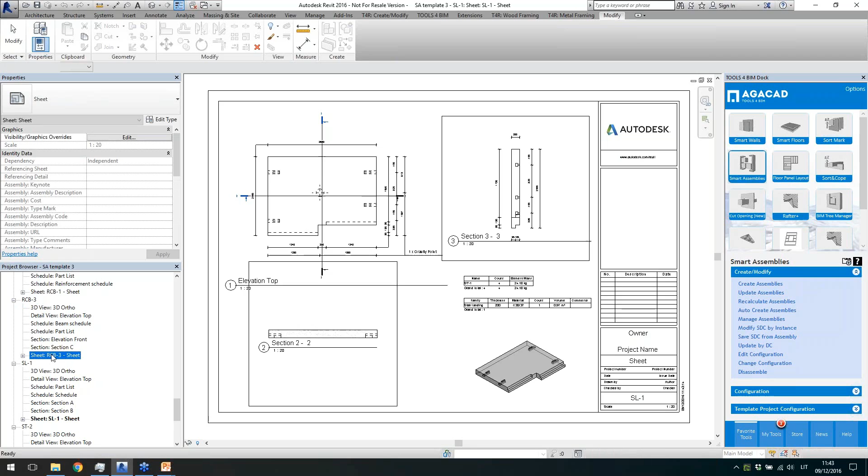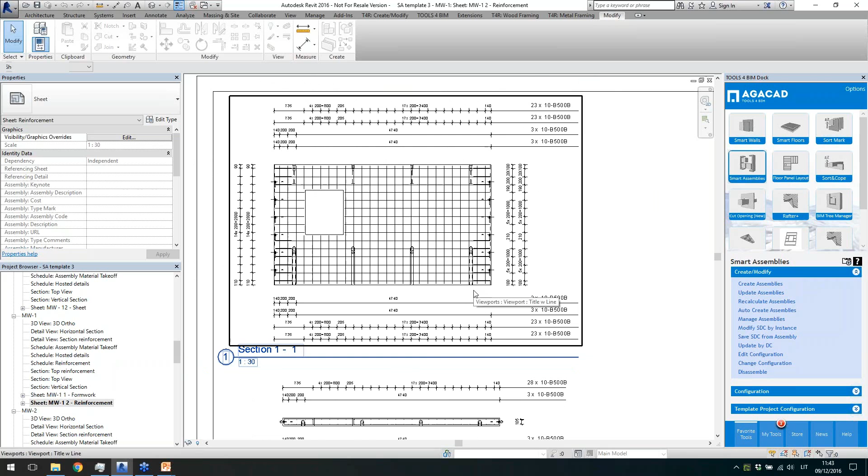Now I want to show you the formwork and reinforcement. Let's say I have a wall, and I can create two sheets, it's not necessary to create only one sheet, I can create a few sheets. So in one sheet I have the formwork drawing, and in another sheet I have the reinforcement drawing, again with some automatic dimensions for the rebar schedule. That's just according to my configurations.

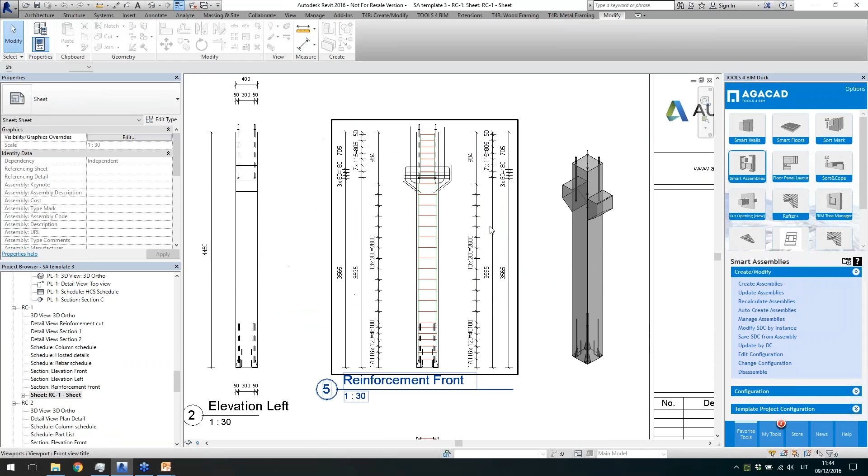So that's what I wanted to show you. Maybe I also have the column with reinforcement, so again some reinforcement and more views placed on this sheet. Also a beam with reinforcement could be created like this. You can use it in different ways.

And again, we have different options to update assembly, recalculate gravity point, auto create assembly. So I can just use a name of assembly and use the auto create assemblies option. Then manage assemblies gives us the option to select all the same type assemblies.

In my project, let's say I can show primary and secondary assemblies. The primary assembly has drawings actually, and the secondary assemblies are just the copies.

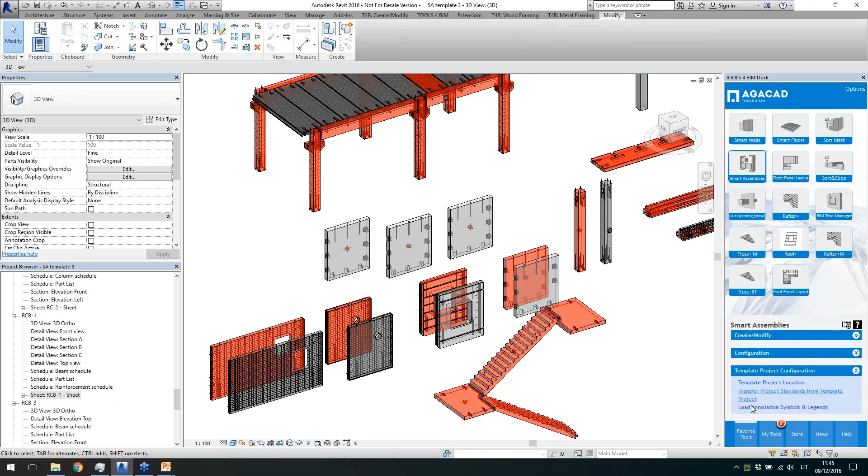Then we have edit, update, change configuration options, which are for configurations and template projects, so we can load information from the template project.

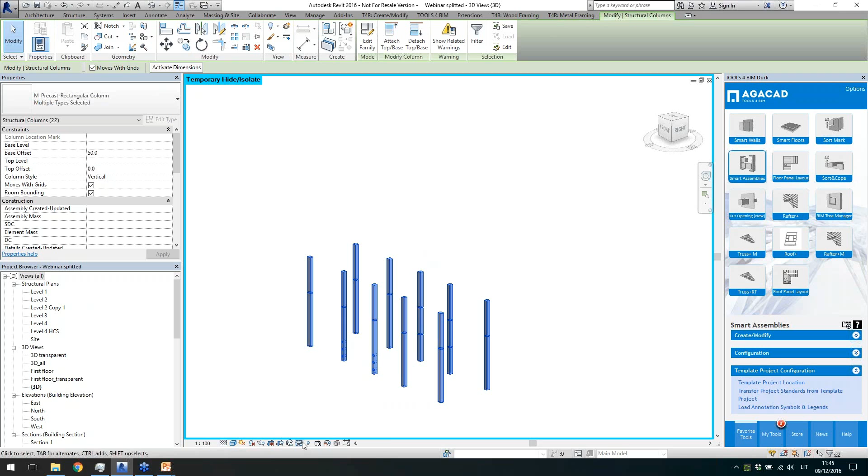Another thing I want to point out about smart assemblies is that when you have in your project, let's just select a couple of columns. So when you select a couple of elements in your project, let's say I select 3 columns, and when I create assemblies, it will not create one assembly like Revit would do, but it will create 3 assemblies for me. That's the difference, smart assemblies works with individual elements.

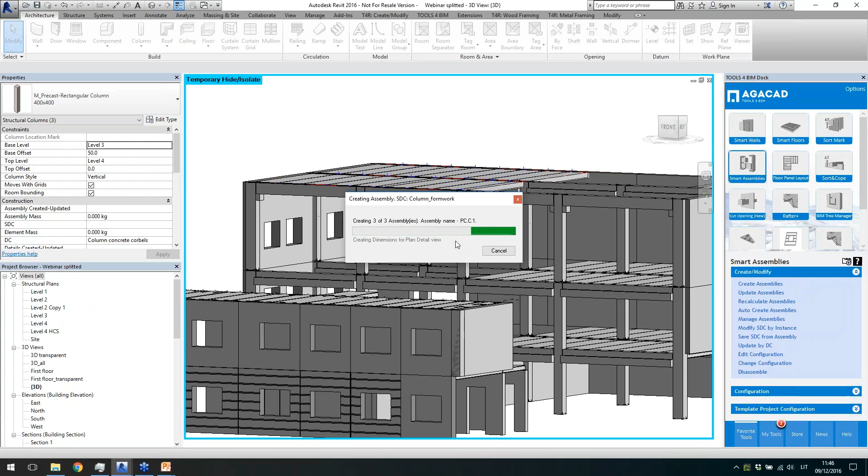It just doesn't create one assembly of the selected elements, but it will create separate assemblies. So let's say I will create these columns now, 1, 2, and the 3rd assembly will be created. If I have the assembly configuration name in the property, I can select different assemblies and choose the auto create option.

Now I have these new assemblies created, and the numbering stays with my last configuration. So now I have 3 assemblies instead of 1 assembly, which would be done with Revit. That's the difference, I think.

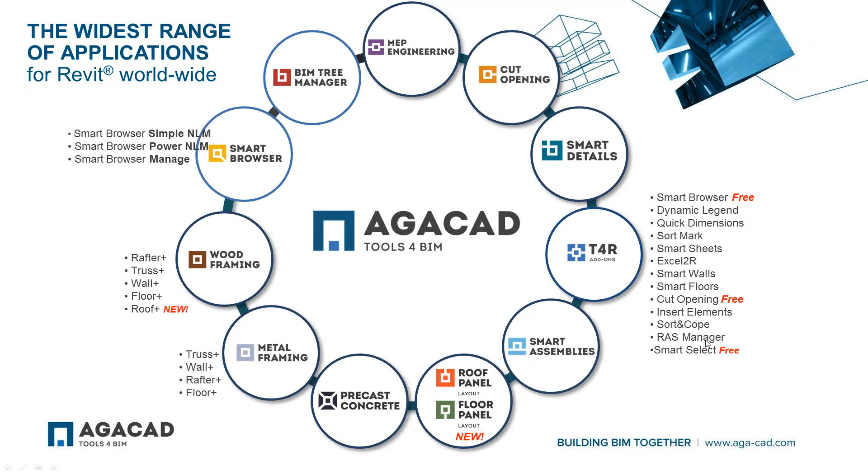I think that's what I wanted to show you here, and I hope you can stay on Revit and stay efficient while working with these solutions. Just a few words about our solutions: we have more solutions to work with families, work with project parameters in your project, with MEP elements. I showed smart details, we can have automatic cuts in elements according to pipes and ducts, and small tools to insert Excel information, select elements, sort elements, place dimensions, and so on.